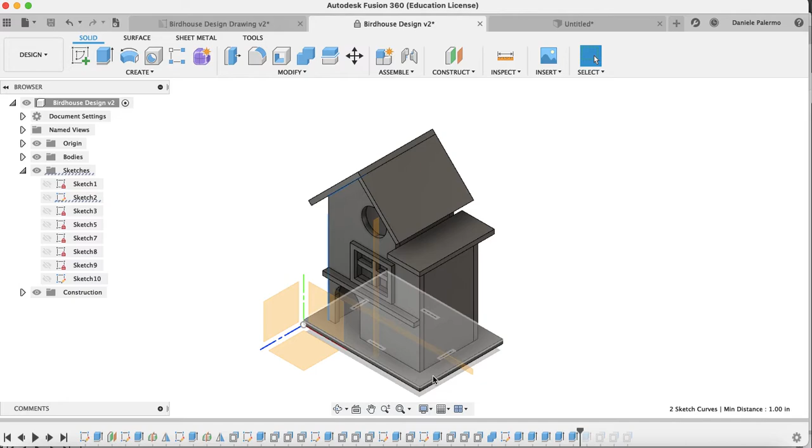All right, so what we're going to do is we're going to start by designing this base first. We'll start with the base and then I'll do the front face after that. Now the base needs to be approximately 7 inches wide by 5 inches deep.

So I'm going to create a sketch on the bottom plane, and choose a rectangle and create the rectangle at 5 inches by 7 inches. I'll zoom to fit here on my screen, and you can see the rectangle's already fully constrained. We specified the origin as well as the length and the width.

So I can finish sketch and go back to my home view here and hit extrude. So E on my keyboard for extrude.

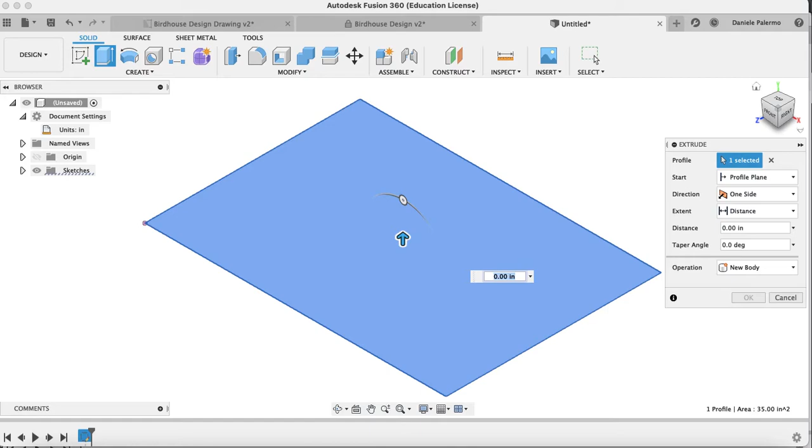Now, the size of the wood we're going to use, we're just going to use 1/4 inch MDF. So I'm just going to drag this up 0.25 inches. That's going to be the size of all our panels here.

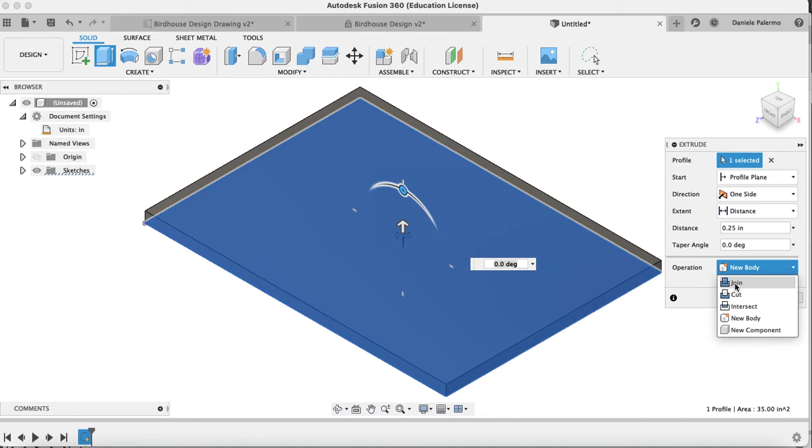By default, you'll see that it will select a new body, which is what we want, but you'll see that as we add to this, by default it won't select new body. By default it'll actually go to join, and we want to remember to always choose new body here and hit OK.

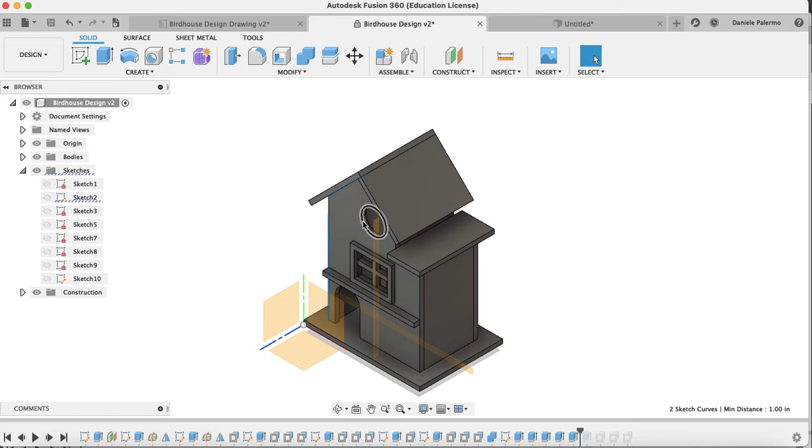Alright, so we've got our flat base here. Let's go ahead and create the front face, which is going to present the biggest challenge with respect to its sketch. As you can see from my drawing, I've got to create this outline of a shape. Now, I'm not going to create the windows or the doors yet, because planning this out, I want to take this front face and mirror it without all of those features.

I want to mirror it to the back here. So we're going to mirror across a mid-plane to the back. You can see that I created a mid-plane here. We're going to have to create one in our sketch, but let's start just by drawing the front face.

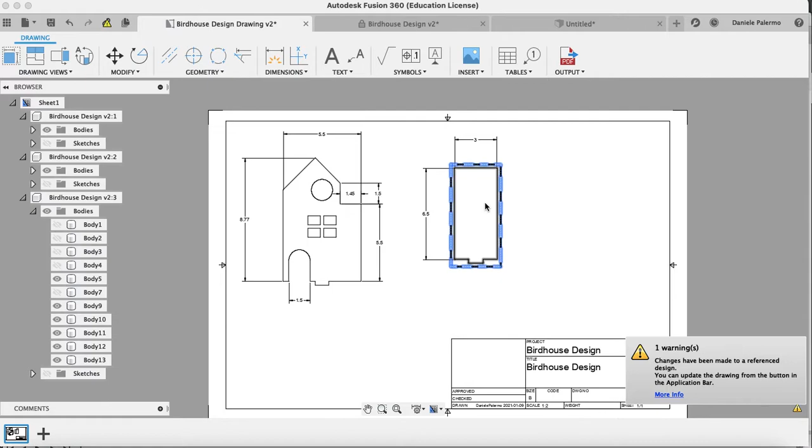Now, the front face isn't going to start right at the edge here. I actually want to sketch it. If this is 5 inches deep here, and I go to my drawing, the side panel is 3 inches. So this side panel here is 3 inches right there.

Okay, now it's 3 inches plus 1/4 here, plus 1/4 there. That's 3.5 inches. That leaves me 1.5 inches of space left over. Divide it by 2, so I'm at 3/4 of an inch here and 3/4 of an inch here, 0.75.

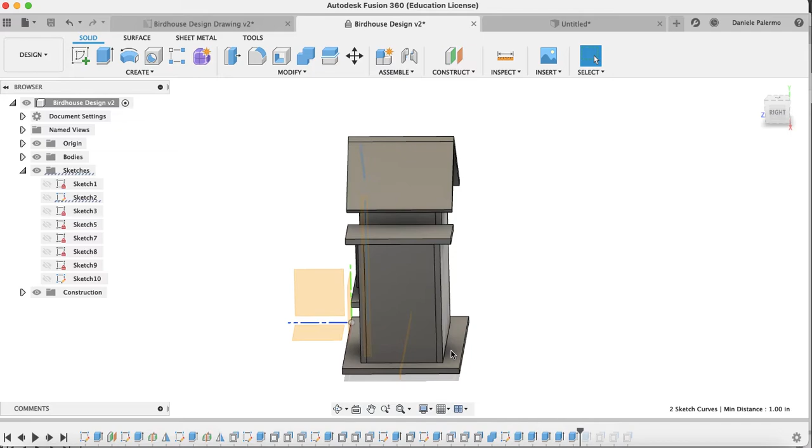So I want to offset a plane. If I view my planes here, if I just hit the little eyeball there, you can see that my planes appear from being unhidden. I want to offset this plane 0.75 inches inwards.

So to do that, I go to Construct, Offset Plane here, and drag that. Now you can see the negative sign pops up because I'm going in the negative direction. So put in negative 0.75. And there's my offset plane.

All right, so now I can go ahead and create a sketch and select this plane here. And you can see it's going to take me nicely to my front view.

Now, before we begin, I want to create a rectangle, but I have a problem. Notice I want the rectangle to snap to this line here, but there's no line that exists on my actual sketch plane. Look at my plane here, there's no line there. But I showed you in previous videos how to project some of your geometry or lines.

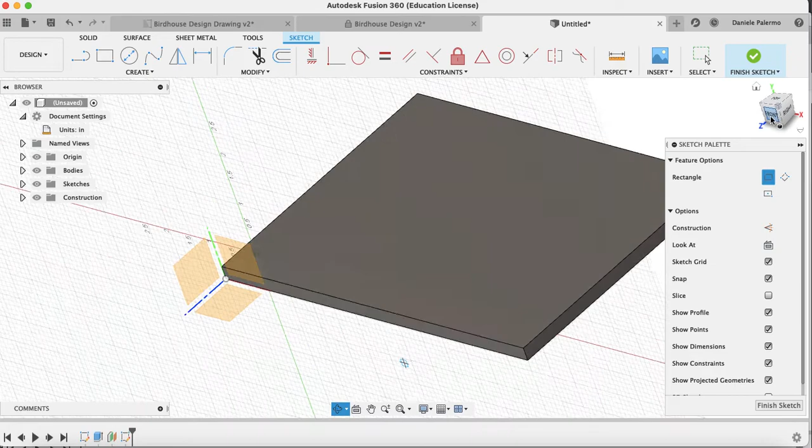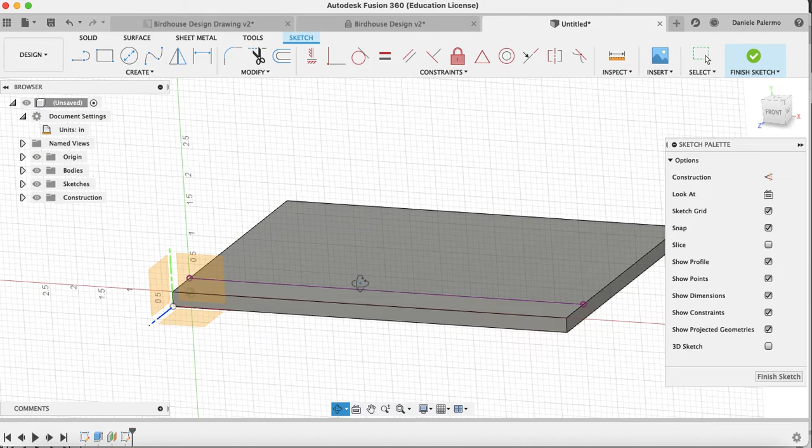So let's go back to the front view, and we're going to do this often in this video. I'm going to hit P on my keyboard after I started my sketch. Hit P and then select this line here. Now watch what happens. If I orbit around, look at how it projected that line onto my sketch. That's what I want, right? So that's an important step.

Now if I go to create a rectangle, I'm just going to create it randomly anywhere. So let's say right here. And I'll fix the size, but let's just draw that for now.

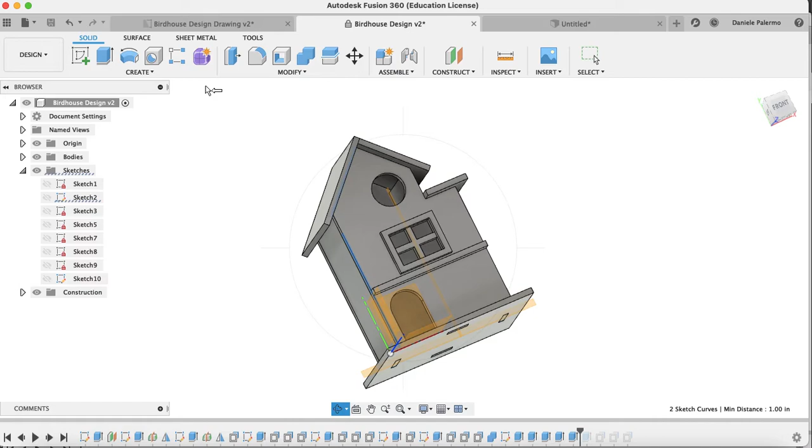Okay, now according to my drawing, I can tell you that I'm going to draw a rectangle that's 6.5 inches tall, going across this line right here. I'll show you in this drawing. Starting from here down, which is the size of my side panel, is 6.5 inches long. So I'm going to create a rectangle that tall, and then 5.5 inches wide here, since this face is 5.5 inches wide. So 5.5 wide by 6.5 tall.

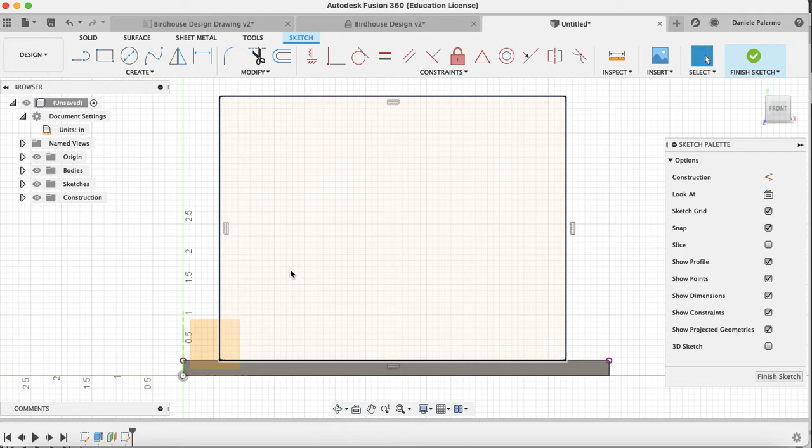Now I'll create the dimensions in a second. I can do them right now, it doesn't matter. Okay, dimension that line to be 6.5, and dimension this line here to be 5.5.

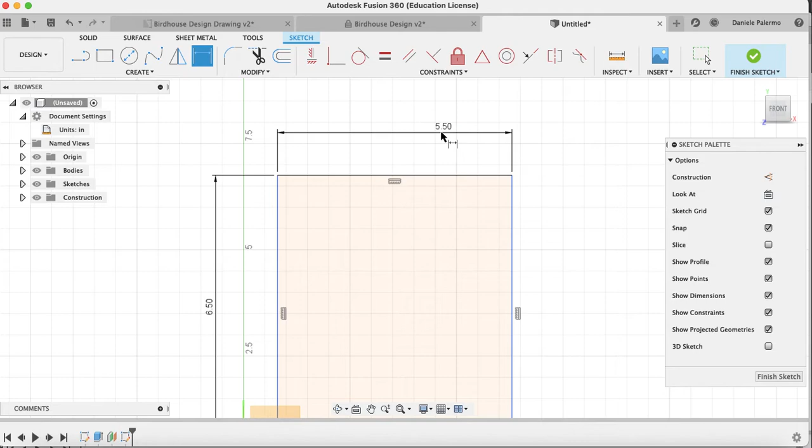Now you're probably saying, okay, well, this needs to be centered, right, this rectangle. So let's go ahead and figure out a way that we can center this. The way I'm going to do it is I'm going to actually draw a construction line in the middle. Construction lines, of course, are not part of your geometry, they're just there as reference. So I'm going to create a construction line right up the middle from the midpoint here of this line.

And then I'm going to create a constraint, a symmetry constraint, constraining this side and the middle to be symmetrical. All right, so we're going to do that.

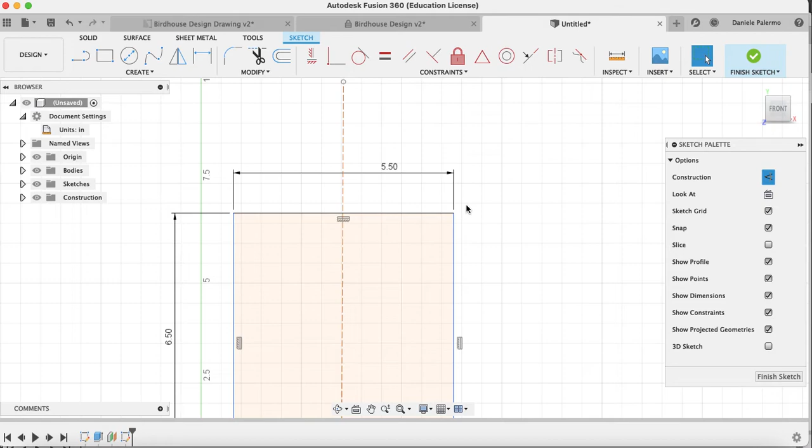So let's start by creating a line, making sure we're selected on construction line here. Okay, and we should snap, there it is, when the triangle pops up, that's the midpoint. So click, drag up, and I don't care how big this is right now. Make it much bigger than it probably needs to be because we'll need that additional space later. So there's our construction line. I made that like almost 10 inches tall there, just for your reference.

Now we're going to go to constraint, symmetry. It's 3 clicks here: 1, 2, the sides that you want to make symmetrical, and then the center line. And you can see that adjusts and actually fully constrains, because that center line was created on this whole bottom projection line. So it is now centering my rectangle on that projection line.

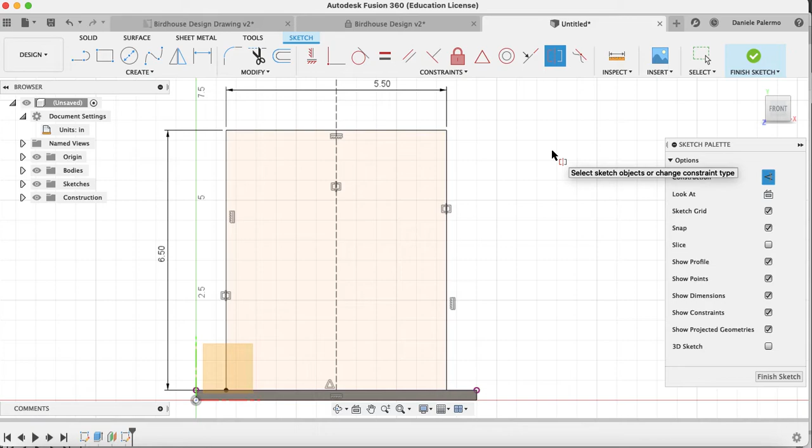Okay, so we've got our rectangle. And if you look at this design, it's got a step in and then it goes up and comes together with the roof after it's stepped in. I'm going to worry about that later because I want to make sure that I draw my roof pitch at a 45-degree angle here and here, and a 90-degree angle by default. If this is 45 and 45, this top angle needs to be 90 - the angles need to add up to 180. I want this to be 90 degrees so that my panels can fit together. Once I extrude my roof panels, I want them to fit together in a perpendicular fashion.

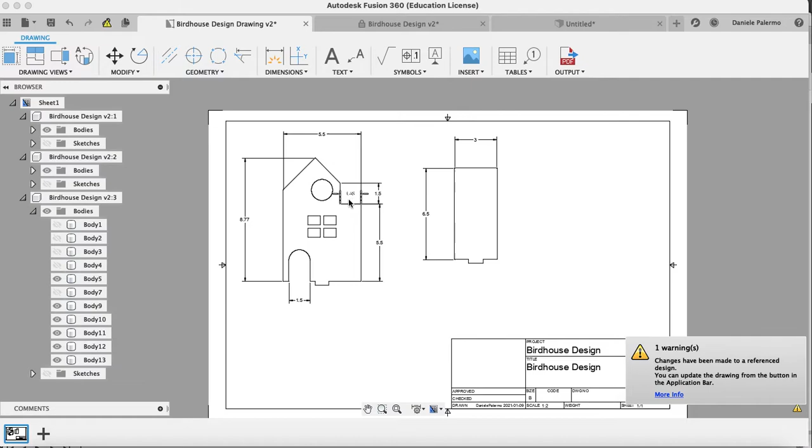So let's go ahead and do that, and I'll worry about this little step here a little bit later. All right, so back to my sketch - I want to create a line from this corner to this corner.

And you can see 45 degrees. Oh, and it's a construction line, so let's remove that construction button there. Back to line, and it should snap to a 45. You can see there it is, it snapped to a 45.

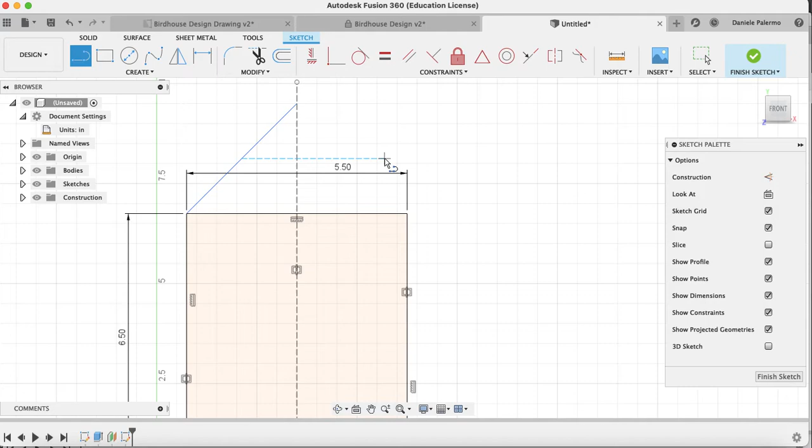Now I'm not going to worry about the length so much, so let's just click there. And then let's do another line from here to here, and that should, of course, also be 45. It says there 135 - that's just because it's using the supplementary angle of 180 minus 45. So it's fine, it should all work there.

Now that should by default make this 90 degrees, right? I probably should put a constraint there to say that, because it may end up being over constrained. Let's see, I want this and this to be perpendicular. And there you go, perfect.

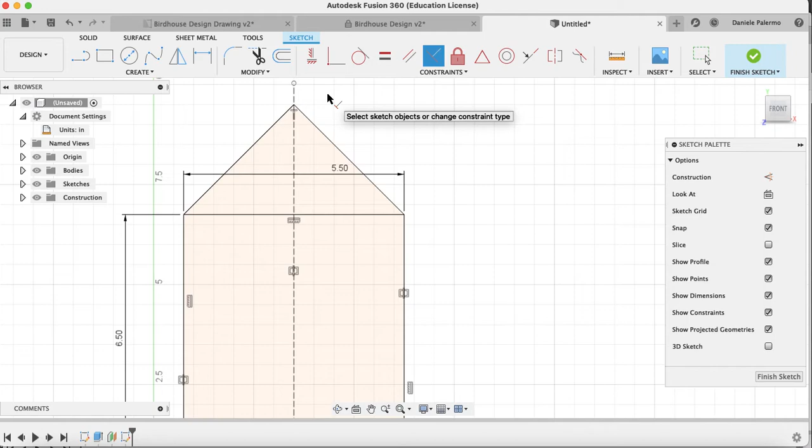All right, so I don't even need to dimension anything after this. All I wanted to make sure was that these angles were 45, 45, and 90. I don't care how long those lines are. Okay, and if I hit T on my keyboard, I can trim - hit T and I can actually trim that line if I wanted to. But I mean, it's a construction line, so I don't really care.

Okay, let's do that step in now, right here. So I'm going to hit L on my keyboard for line, and I'm going to just choose anywhere right here to click, and then maybe click here, and then go up until you touch your roof. All right, now let's trim out some geometry.

This line, and this line. Now you can see that totally removed any constraints from my sketch, but we're going to add some dimensions and you'll see that the constraints will come back. That happens after you trim, okay, because you've gotten rid of some geometry, but we'll fix that. And actually we can trim this line and this line as well.

We don't need that. All right, so I'm going to hit D on my keyboard for dimension. I'm going to make this line 5.5. And let's say that this line here is going to be 1.5, a little bit less, just to give you more of a roof there, more like a longer panel. And then I shouldn't need to even create this dimension, but that works out nice that it's 2.5.

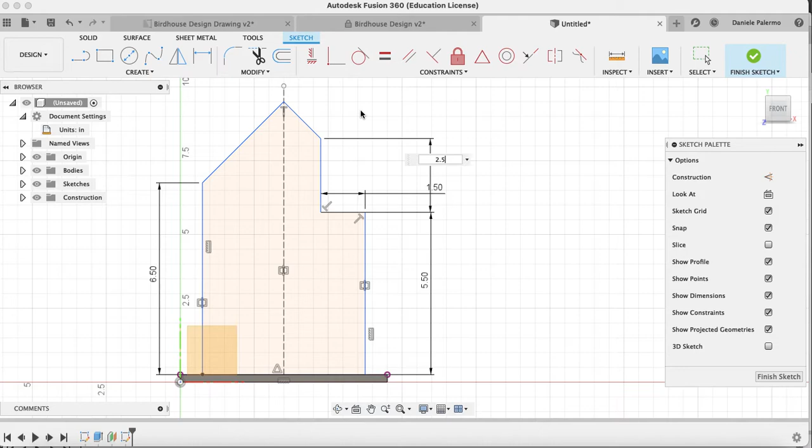And let's maybe create this dimension here, not that it matters. And you can see that then everything becomes constrained again and everything turns black, which is what we want.

All right, so I think I'm happy with this. Maybe the only thing I might change, maybe I'll push this up to 5.75. So I'll double click that dimension and change it to 5.75. And maybe let's double click that and change that to 1.4. Okay, I think I like that better.

All right, so I'm happy with this. It's fully constrained. Let's finish sketch. All right, and let's hit E on our keyboard. Oh, and actually I did forget one important thing.

So let's go back in and edit my sketch. I just right click the timeline where the sketch was and edit sketch. I want to add two tabs that are going to be pushed into this bottom base to kind of locate and help me hold together this panel here. Because I am going to glue these together, but I want them to be able to stand on their own as I'm gluing them. So I want to create tabs that are going to cut into that base.

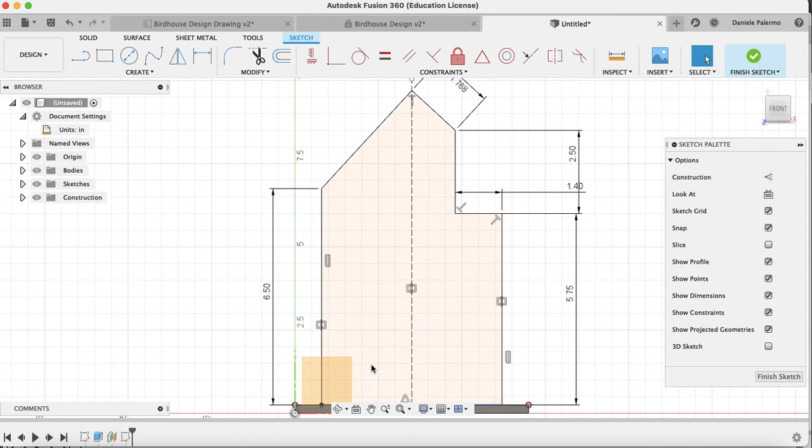So let's do that. All right, so first this base is kind of distracting because I want to put two tabs here. So I'm just going to go to bodies and hide that bottom body. All right, now I'm going to hit R for rectangle and just create any random rectangle. Now, since it needs to cut into my quarter inch plywood, this should be 0.25 inches, right?

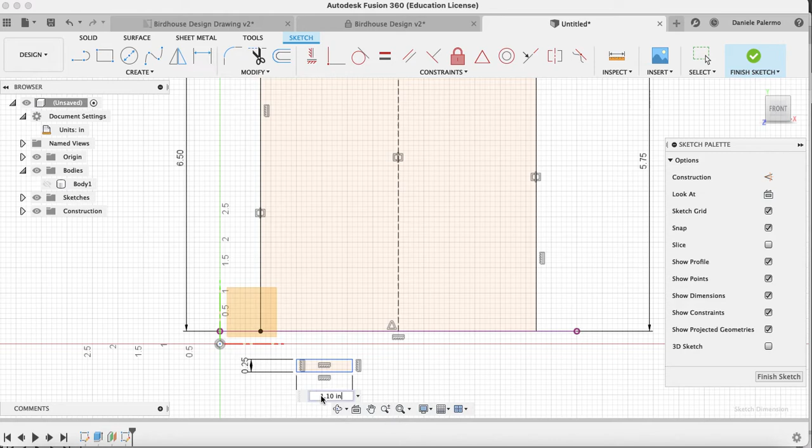And this line here, let's make that 0.75. That should be good enough. Let's make it 1. Let's change that to 1.

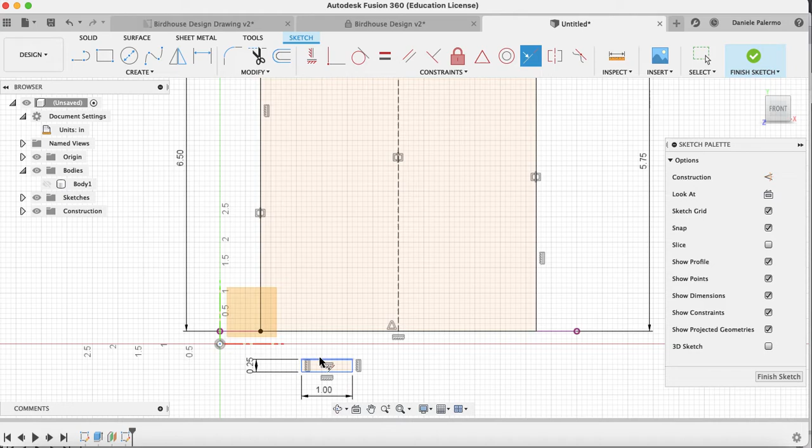All right, now I want to attach this to here, and I'm going to use a constraint. So hit escape to escape out of the dimension tool. That's why it's still blue, I need to give it a location, right? So I'm going to hit a constraint, and I want to do the collinear constraint, meaning that I want to make this line on the same line as this line. All right, and it'll place it on that line. Now, let's give it a dimension off of this side so that it knows how far away from there it needs to be. So dimension from this point to this point. Let's make that 0.75 off.

Okay, we can even go a little bit less. Let's double click that and change it to 0.65 maybe. Okay, I like that better. Gives you more space in the middle here.

All right, and now what I'm going to do, the nice thing is I can just mirror that across this center line. I don't have to create another one here from scratch. If I can just select this here, do a window from left to right, go to create, mirror, okay, and that's already selected because I selected it. So go to mirror line and select your mirror line, and look at that, it pops up, and it's already fully constrained. All right, perfect.

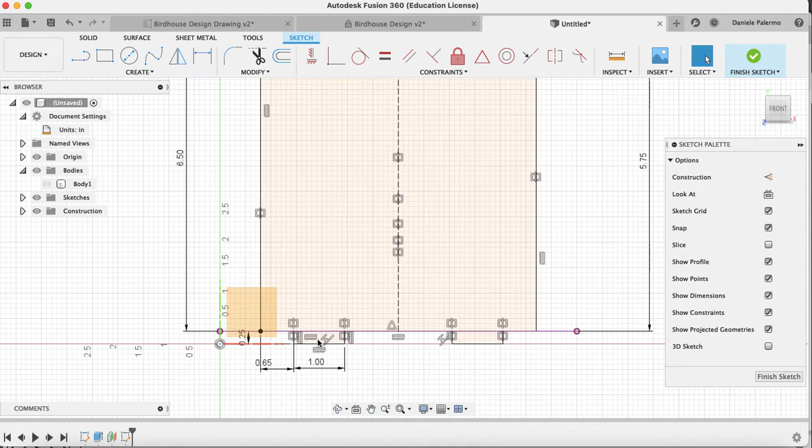So I added those tabs. So let's put the body back in. Let's unhide that. Let's go to finish sketch, home view. All right, and let's hit E on our keyboard for extrude. And actually, let's still hide that body just so we can see those tabs.

We need to extrude those tabs as well. So we're going to extrude this, this, and this 0.25 inches inwards. So I just flip the direction so you can see that it comes up as negative. So put negative 0.25. All right. Now, just make sure that the operation is new body. Okay, make sure it's new body.

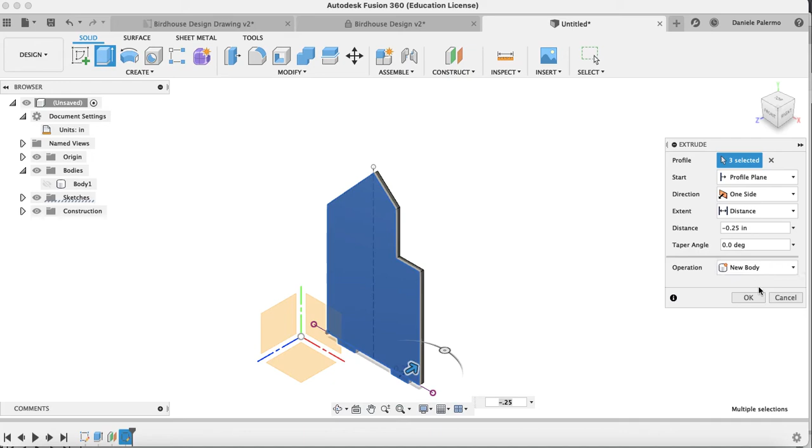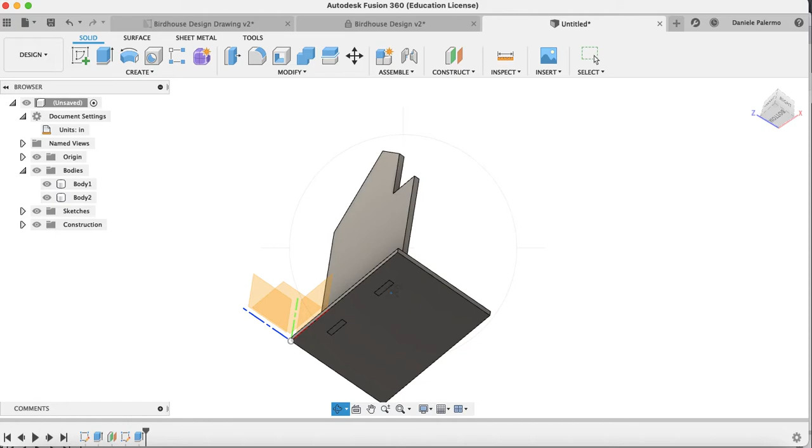Okay, hit OK. Now let's unhide this. You can see those tabs are going into my base, but we need to cut out those rectangles in my base. I'm going to do it at the very end because right now we have intersecting geometry. We'd actually get an error here because this is going into my base, but I haven't cut out those shapes in my base yet.

Let's move on and mirror this to the back. Remember I said I was going to mirror that. But to do that, I need to create a mid-plane. Once I'm in 3D, I cannot create a line and then mirror across a line. That's only in a 2D sketch. When I'm in my 3D model, I need to mirror across a plane.

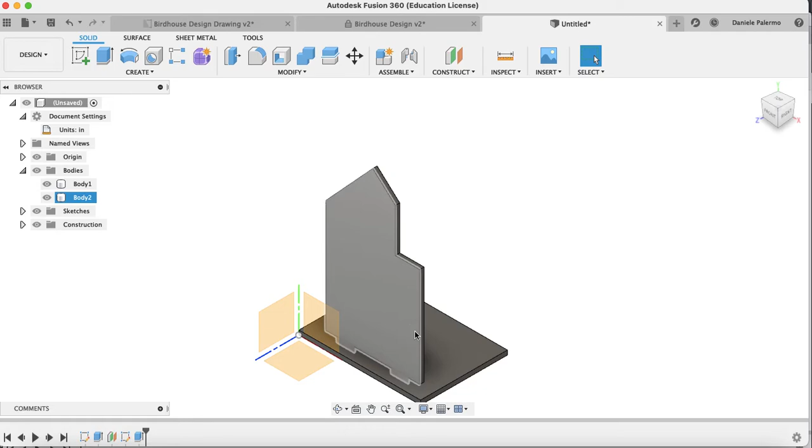So what I'm going to do then is create a mid-plane on this base. If I go to construct, mid-plane, select where you want the plane to be in between. I want it to be in between this face, orbit around, and this face. You can see it drew the plane. Perfect, hit OK. Now I can go to create, mirror.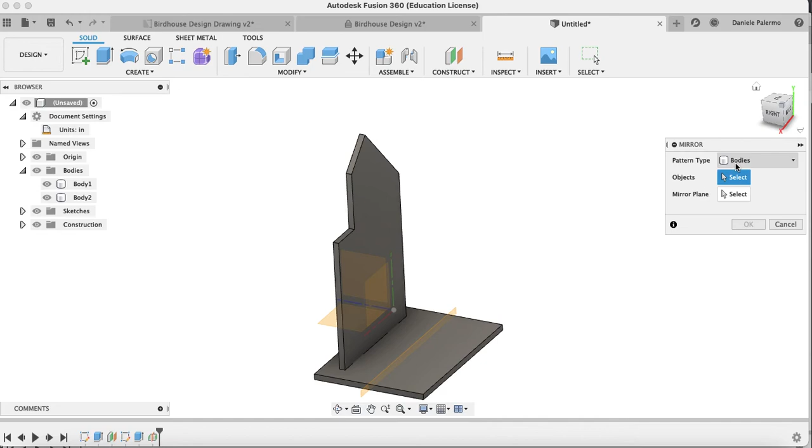Select, make sure that your pattern type is bodies. I think by default it will be faces, so make sure you change it to bodies. Select this body, then select the mirror plane right there and hit OK. You can see that saved us some time, I didn't have to draw that from scratch.

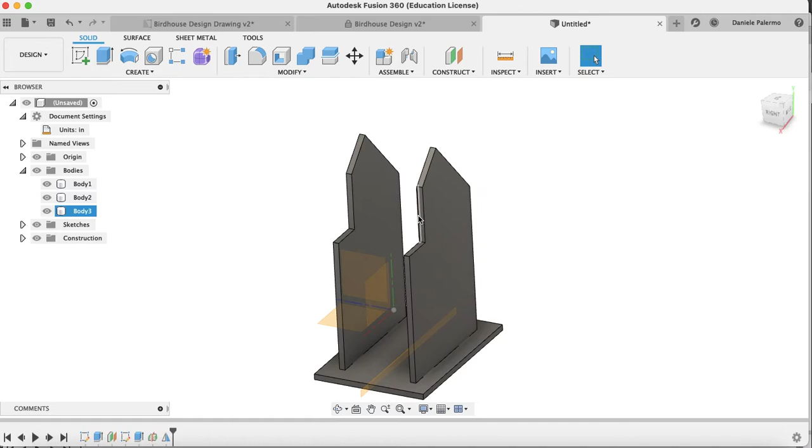So let's go ahead now, I'm going to do the side panel. There's a side panel here, one up here, and then one on the other side there. Let's go back to my home view so I can see what we've got. Now this is actually going to go by a lot faster because these panels are a lot easier to make.

So I'm going to create a sketch on this surface. That will allow me now to draw a rectangle there. If I orbit around, you can see that my plane is exactly where I want it to be. I want to sketch on that plane there.

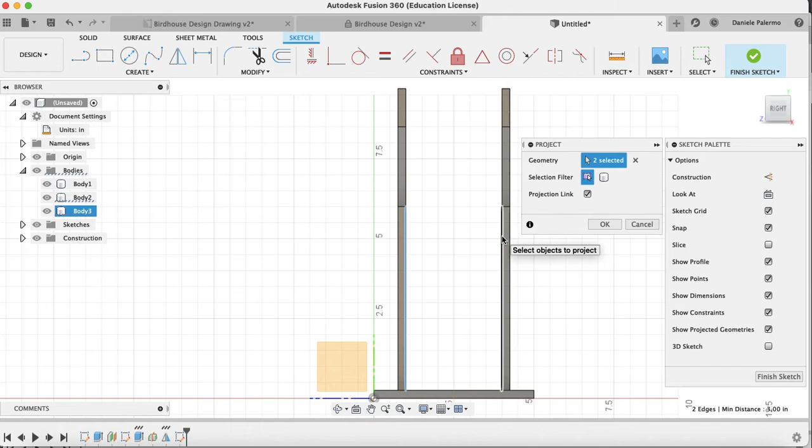Hit escape and go back to the right. Now if I hit rectangle, you may have an issue selecting a proper corner here, so we're going to project these lines. I'm going to hit P on my keyboard, and select this inside line and this inside line because that's where I want my rectangles to be, and hit OK. So I'm projecting those onto my sketch so that these points pop up. Now when I hit rectangle, I can just connect those points.

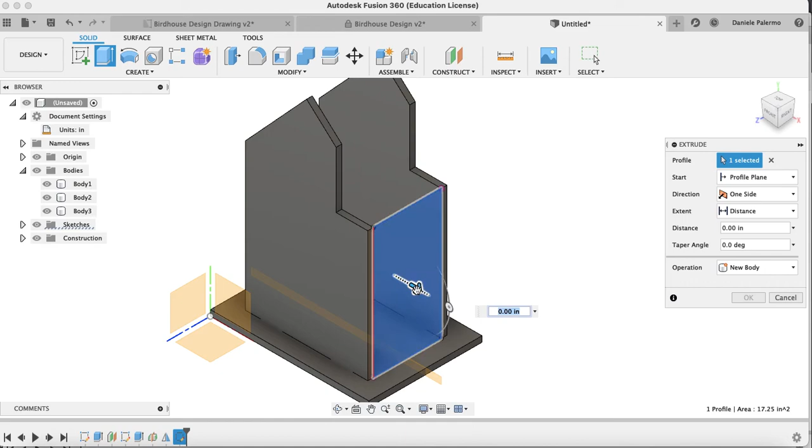And there you have it, it's already black and fully constrained. I can actually just hit Finish Sketch. Now hit E, extrude this inwards, so it'll be negative 0.25. Now be careful here, watch this. Look at by default how this is at join. Hit Tab, so it inputs that negative 0.25, and then make sure you change this to new body. By default it wants to go to join. Okay nice, let's do this up.

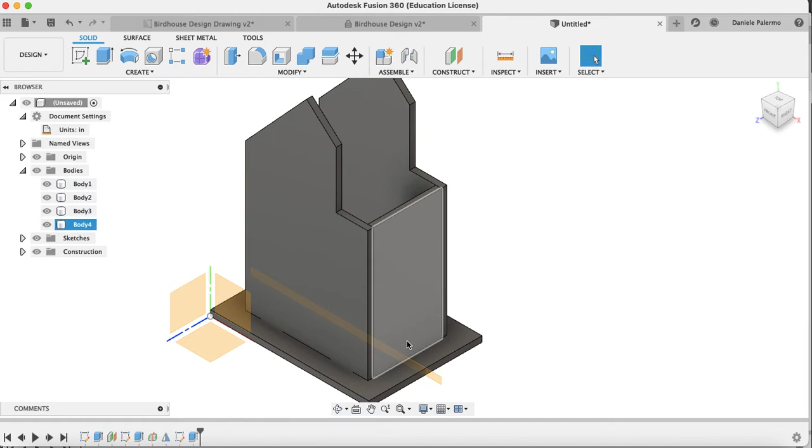Oh, and actually once again I forgot to put those tabs. So let's do that again. I'm going to have to go back in this sketch and edit my sketch. And again I want to hide this base. So body 1, and actually I should rename that.

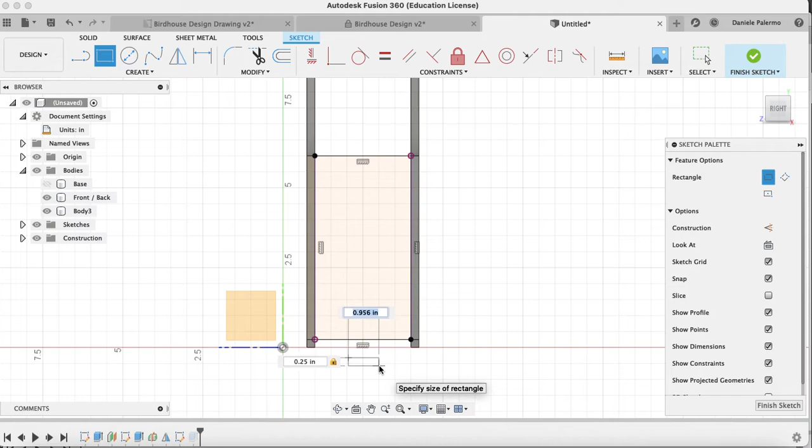Okay, and this will be right bottom. So I need to add tabs. I'm going to hide this base, and I'm going to create a rectangle. Again, make it 0.25 deep there or tall, hit Tab, and I think we made them 1 inch wide. Now you can see it's blue, no problem. We're only going to do 1 tab right in the middle here.

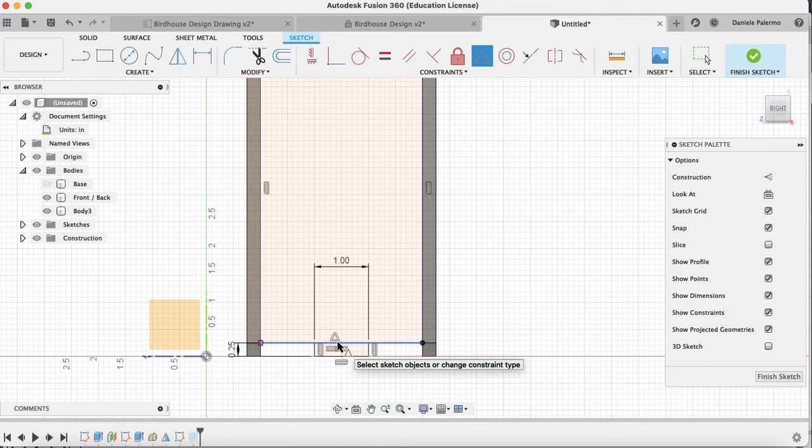So we're going to do a constraint again, not a collinear this time. This is going to be even easier because if I do a midpoint constraint, I can constrain this midpoint of the line there and then this midpoint of the line there, and you can see it already turns black, it's fully constrained. I gave it a location. Okay, let's finish sketch.

And now we have to edit the feature, so the extrusion, to also include that there. So I just clicked on it and hit OK. And if I orbit around, I should see that that worked. It did. And let's turn that base back on. Good. Now we can't mirror that, we're not going to mirror that right now because the other side is longer. So we'll just keep it as is.

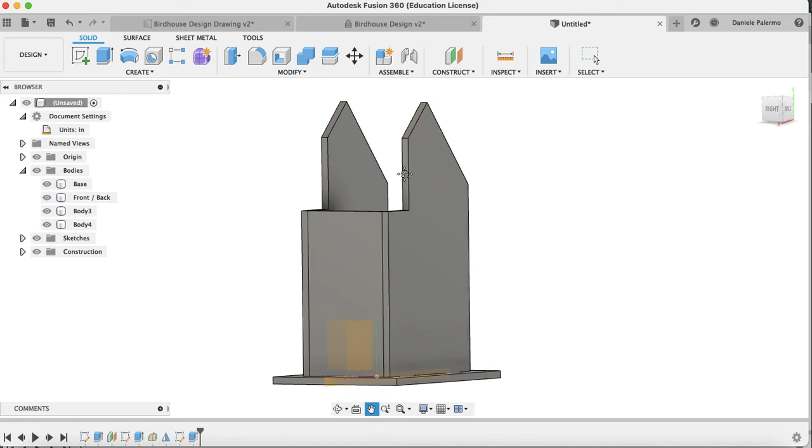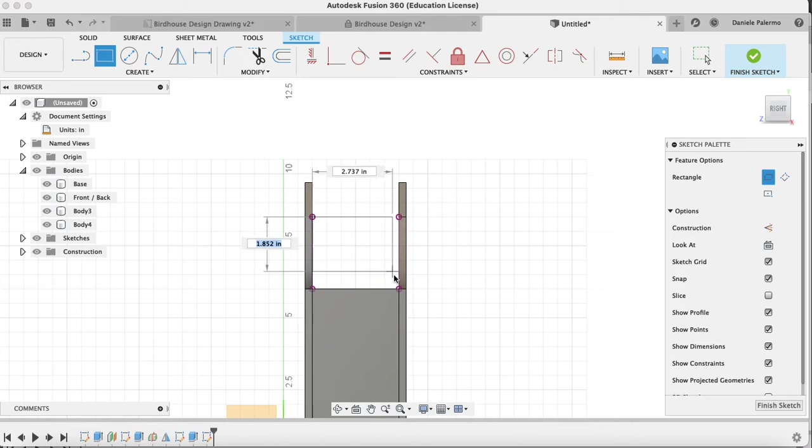And let me do this front face here. So I'm going to create a new sketch on this surface, and I want to project P on my keyboard, this line and this line, and hit OK. Hit R for rectangle and connect. It's already fully constrained.

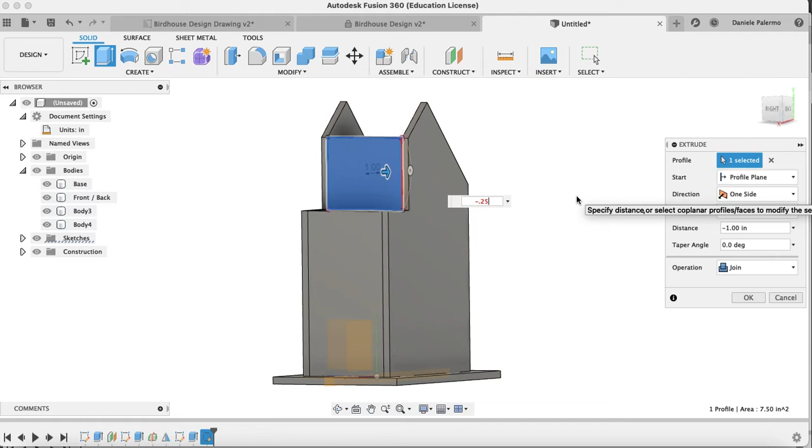I don't need any tabs there, I won't do any tabs there. Finish sketch, hit E on your keyboard for extrude. Select, drag it inwards, it'll be negative 0.25. Now again, be careful, it goes to join, change to new body, and hit OK. All right, it's coming together.

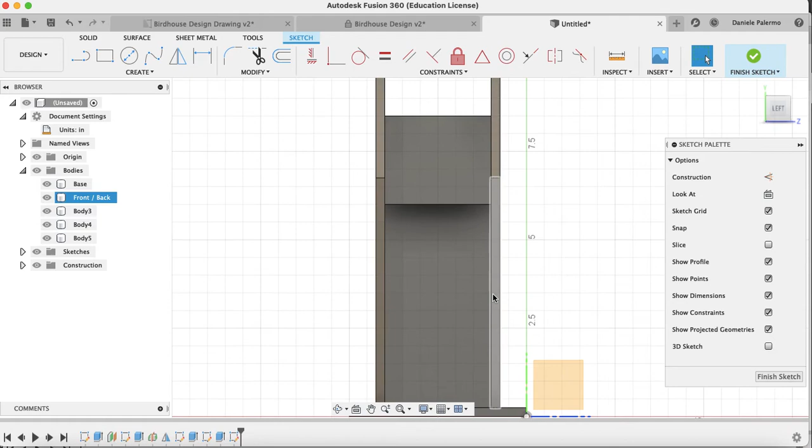All right, now let's do another new sketch right on that surface. Again, P on your keyboard for project, this line and this line, and hit OK. R for rectangle. Simple as that, everyone. Finish sketch. Okay, and let's hit E on our keyboard.

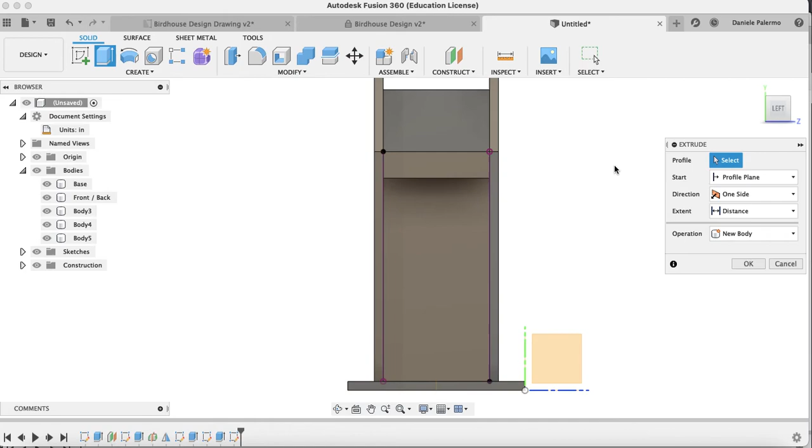And just orbit around a little bit so we can see that we want to drag it inwards. Okay, negative 0.25. Oh, and I just realized that I did not hit new body, so I'm just going to edit my feature, make sure that it's a new body, and keep everything else the same.

Okay. All right, now we're going to do the roof panels. So we can start with this roof panel. This should go fairly smooth. And now you're going to see why I made those angles. That angle up here, 90 degrees. You'll see it now. All right, so I'm going to create another sketch

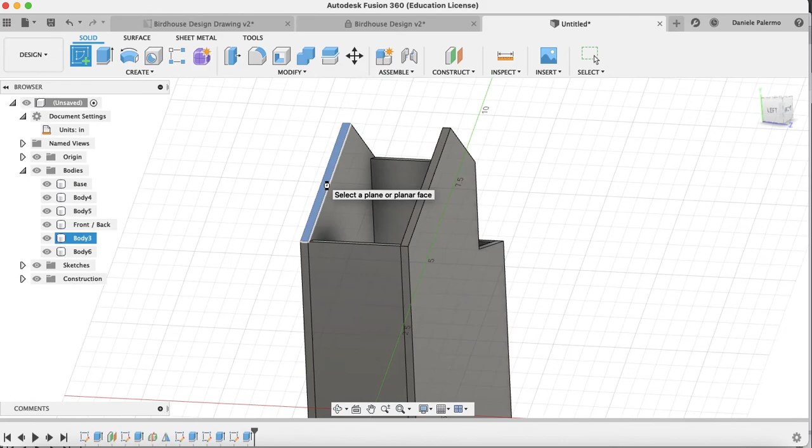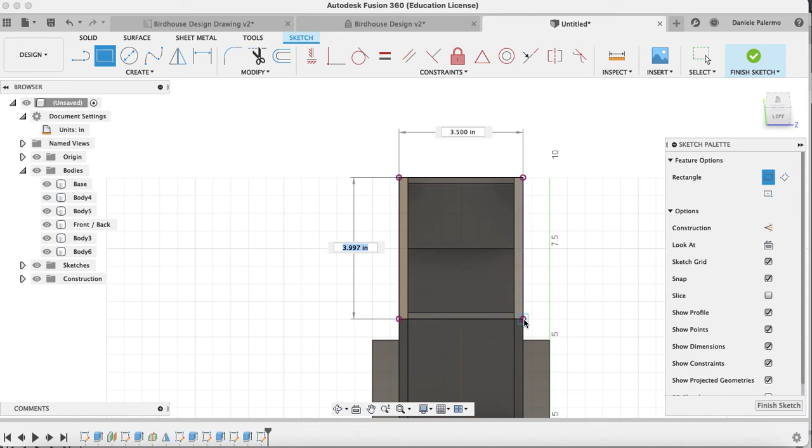here. This time I want my rectangle to be, because my roof is going to overhang, right? So I'm going to actually not project my inside line. I actually want to project my outside line. Okay. Hit OK. Now create a rectangle. Okay, it's going to sit on top there. All right, finish sketch, E.

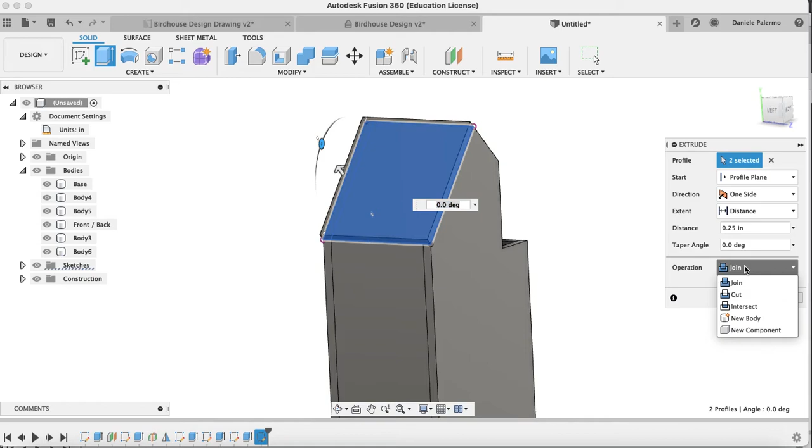And this time pull it upwards. We want the roof to sit up, and we want that to be 0.25 again. And once again, oh, and look, this always happens, all right? For some reason, it doesn't want to select this extra part here. Make sure you click on that too. All right, that happens for whatever reason. And then make sure you go to new body and hit OK.

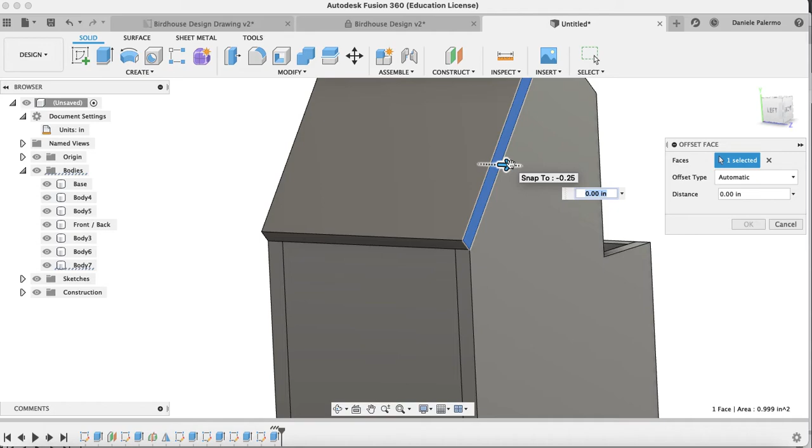All right, now I'm going to show you the press pull tool because we're going to have an overhang here. So a lot like we did with Google SketchUp, this button here is your press pull tool, and you can select surfaces to press pull. So press pull and then select the surface, and I'm going to pull that out, let's say 3/4 of an inch, 0.75.

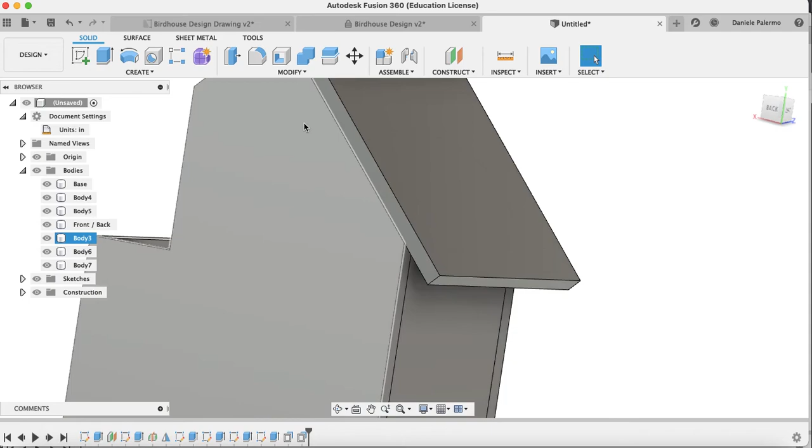I'm going to press pull here as well, 0.75, and orbit around. Do it here as well. Okay. And there's part of our roof there.

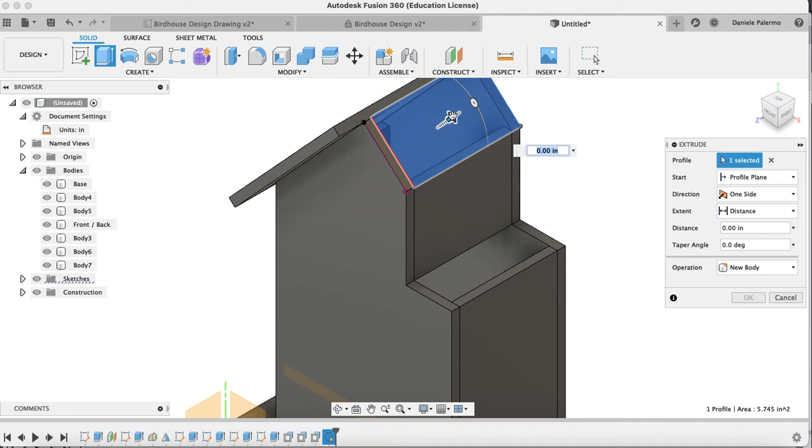Now let's do another sketch on this surface. P on your keyboard, and again, choose the outside lines. R. Okay, create a rectangle there. Perfect, and hit finish sketch, E for extrude, select your surface, and pop that up 0.25 inches.

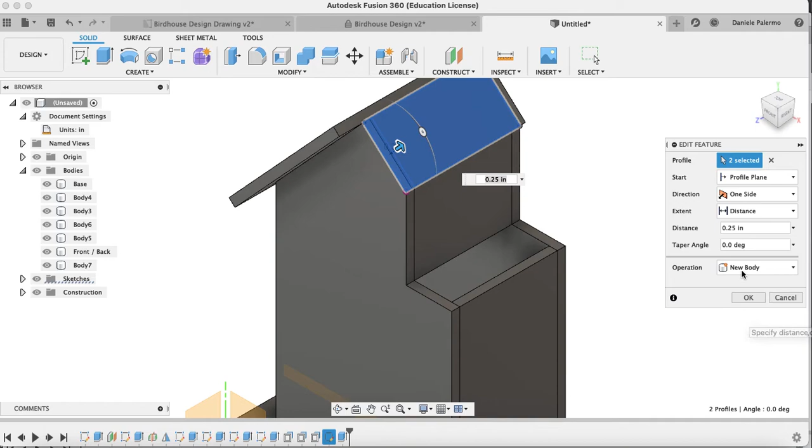Oh, and look, again, it didn't select that portion there. So let's go to edit this here and just add this rectangle. So just hover your mouse over that and click on it, and then, oh, and I forgot to do new body. Okay, it's very easy to forget to do that, but the good news is with Fusion, you could so easily go back and edit it, right? All right, let's push pull.

I'll do this one fast because I've already showed you how to do that. Just might need to zoom in there in order to grab that there.

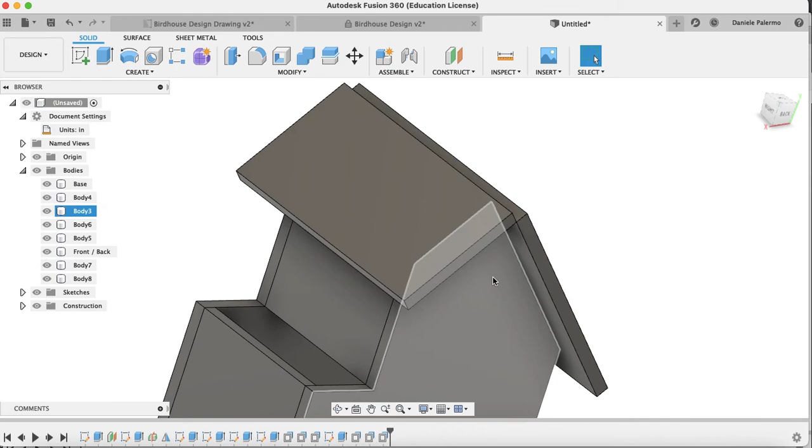Okay, now look at this situation here. Here's why we made our angle 90 degrees, so that these will fit perpendicular. So I can choose one of these, like this longer piece here, okay? Or actually, let's choose the smaller piece. Might look nicer. To push-pull, 0.25 inches to line up with that other panel.

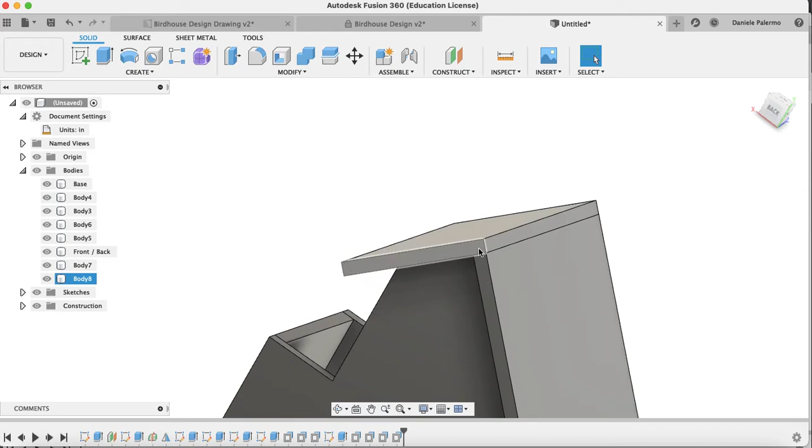And there you go. That's why we chose 90 degrees. Look at that 90-degree angle in there. Otherwise, they wouldn't fit like that, and you'd end up with intersecting geometry. Now, there's other ways around that, you can do other roof pitches, of course, but then once you carve out your wood, you'd have to probably sand down or file down the edges so that these fit nicely, right? But it's still, of course, doable. I just like to do it at a 90 there, keep it easy.

And let's do a roof here. So, new sketch. We're almost done. All right, now I don't like that that's in the way. Here, let's just orbit around a little bit. I probably should have done this first. Let's just hide that. Okay.

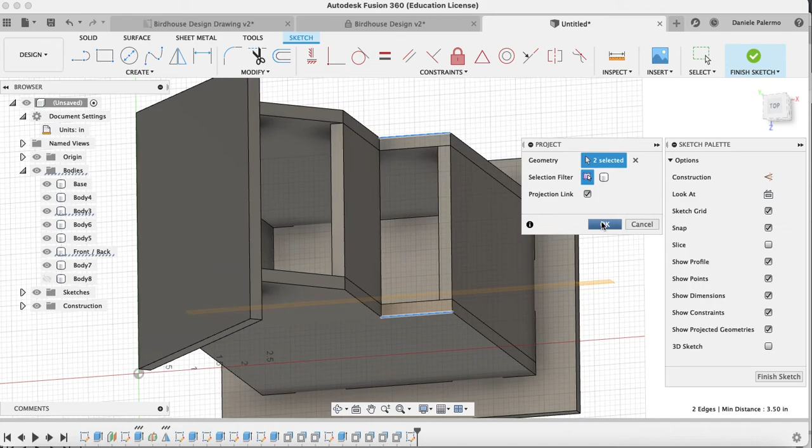So again, let's project, P. Let's project the outside lines there. Okay. Hit OK. And then R for rectangle and connect that there and finish sketch. E for extrude. You can see a lot of this is just getting repetitive, and then go up 0.25, tab, and make sure that it's a new body.

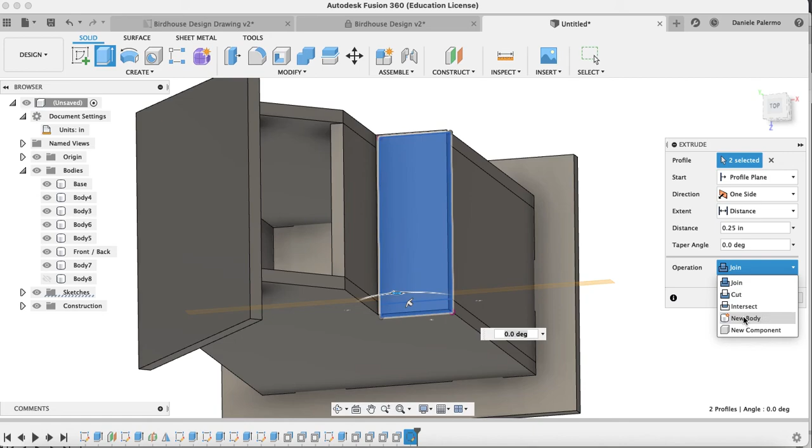Oh, and again, it didn't select here. So make sure you do that, and new body, hit OK. We're going to push pull, of course, or press pull. We want to have some overhang here. So let's go, we'll maybe do a little bit less. Nah, you know what, let's go 0.75. It'll be kind of a hangout for the birds.

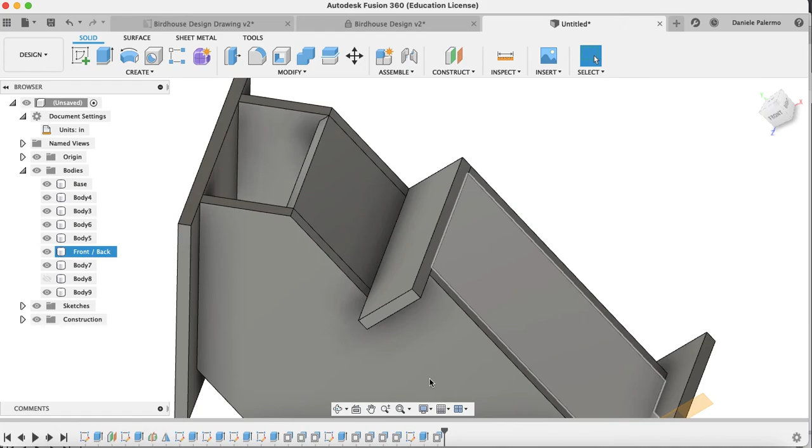Okay, 0.75 and 0.75. Okay, perfect. And looks like we're good to go.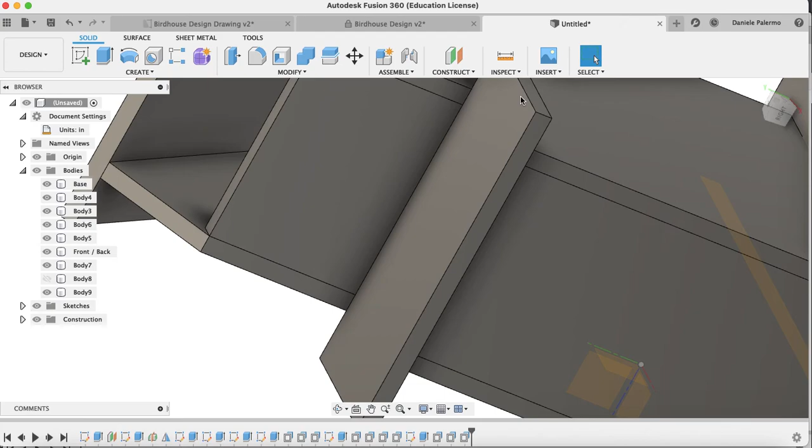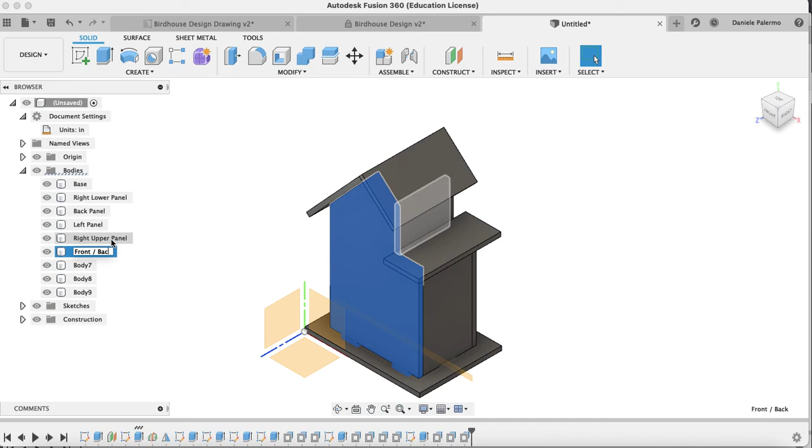Let's go back to view that roof, and let's rename these. Body 4 is my right lower panel. Body 3 is my back panel. Body 6 is my left panel. Body 5 is my right upper panel. This should just say front panel, to stay consistent. This is my left roof panel. Body 8 is my right roof panel, and body 9 is my flat roof panel.

Okay, perfect, so there it is. Now, I did say that we needed to cut into the base. Now that we have everything down here, let's cut into the base. You can watch how easy this is in Fusion.

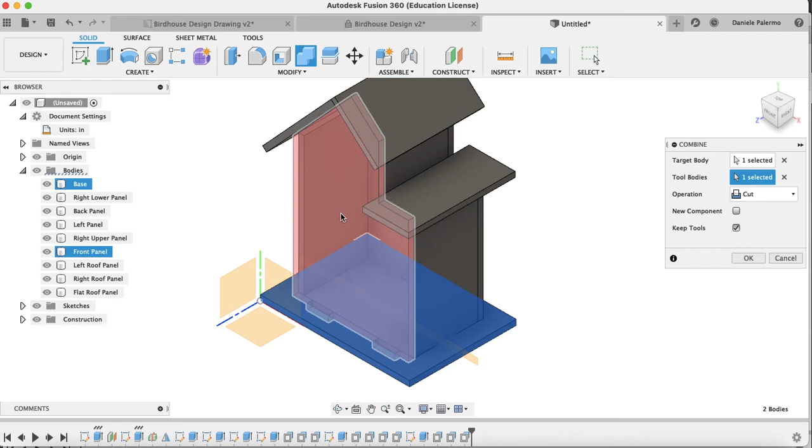There's a button here called Combine. We're going to hit the Combine button. We are going to select the target body that we want to cut, so that is this bottom panel here. Then it says choose the tool body that you want to do the cutting. So it's this, we want this to do the cutting, to cut into my bottom panel. Orbit all the way around, this, and this.

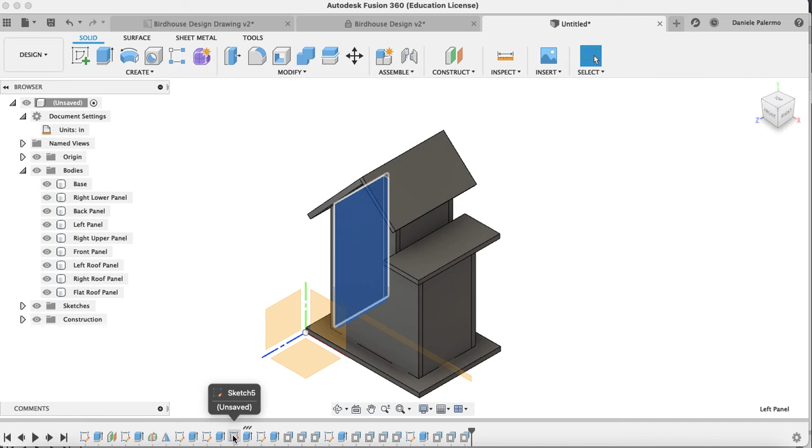Oh, and actually you can see here, I did not do my tab there. All right, so let's cancel. Good thing I labeled and named these panels here, so that would end up being my left panel, right there, right? So let's see where we can find it... there it is, there's that sketch there. All right, so that should be it.

So let's edit the sketch. Now we need to orbit around there, it should be on the other side. Let's view from the left view. So this happens, right? You might forget something, but you can always go back and edit it. That's the beauty here of Fusion.

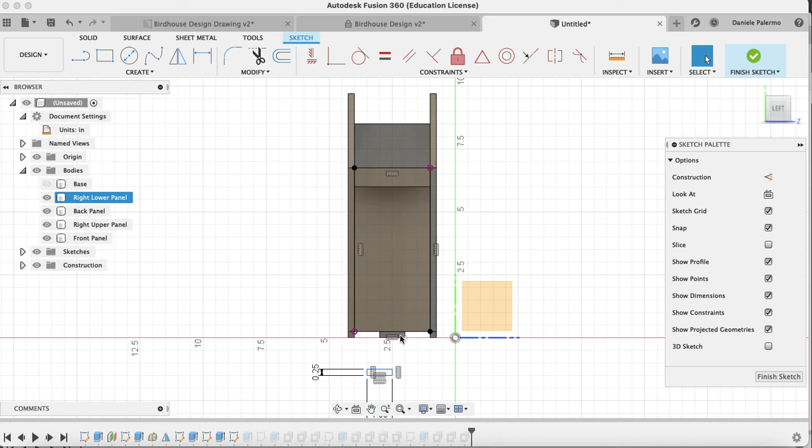So hit rectangle, we want it to be 0.25 by 1. Now let's hide that base. And let's even hide the right lower panel because that tab is from the panel on the other side, so let's hide that too just so I could see better. Let's zoom in. And now let's do a midpoint constraint for this and for this.

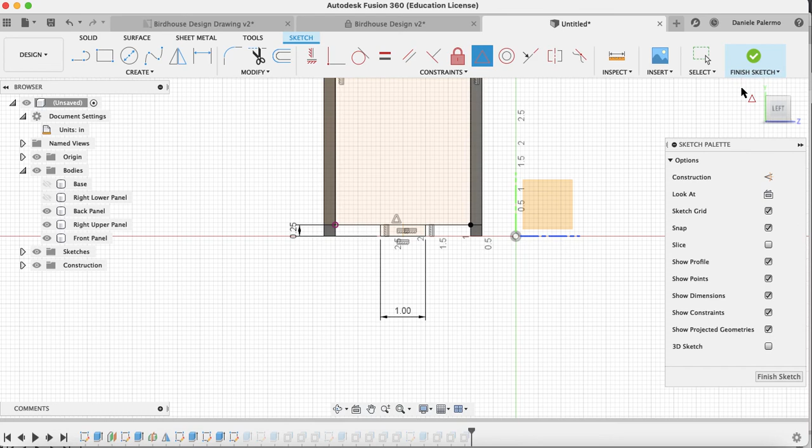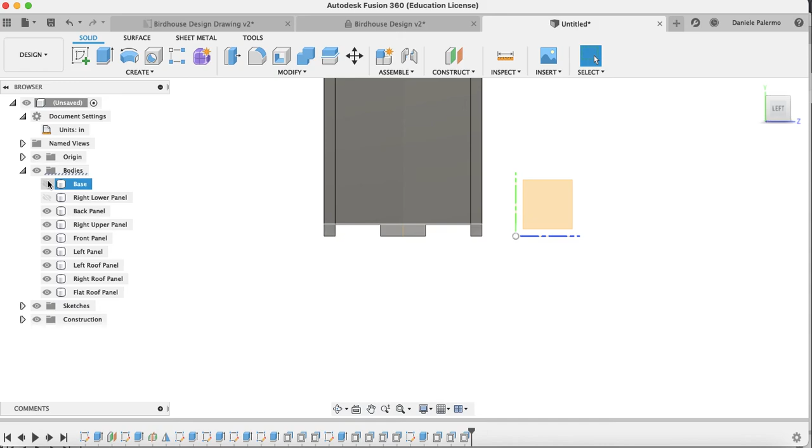Okay, we could hit finish sketch, and then we're going to edit this extrusion, extrude 5. Because it's still not showing up, we got to go to extrude 5 and edit that feature and make sure that we also click on that there. And then everything else is good. Hit OK, let's go back to unhiding these. Okay, and now we're good to go.

Let's now go back to the combine tool. Choose our target body that we want to cut right there. Our bodies that we're going to use to do the cutting will be this, that, and that. All right, so it should say 4.

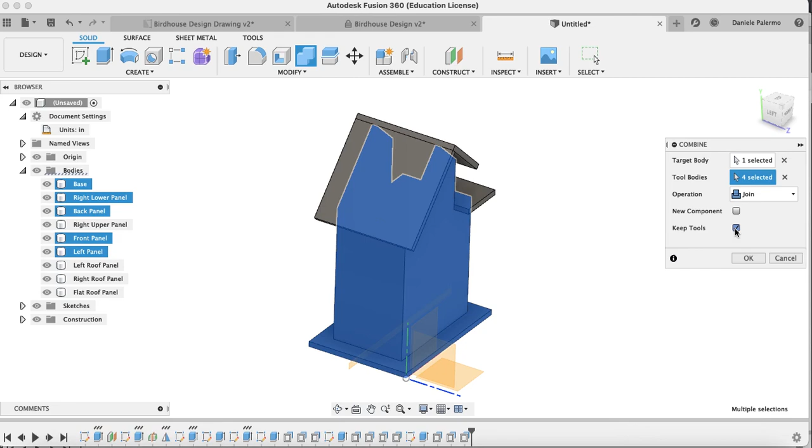Now by default, I'm pretty sure yours won't say cut, it needs to say cut. I think by default yours will say something like join, you don't want that. And by default this will not be checked off, so you need to change this to cut. And you need to say keep tools, like you want to keep these tool bodies, you don't want them to be gone. Otherwise they'll be gone. So hit keep tools and hit OK.

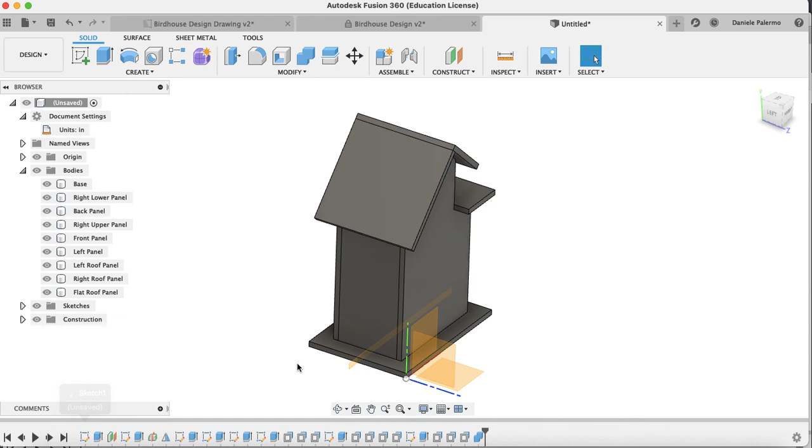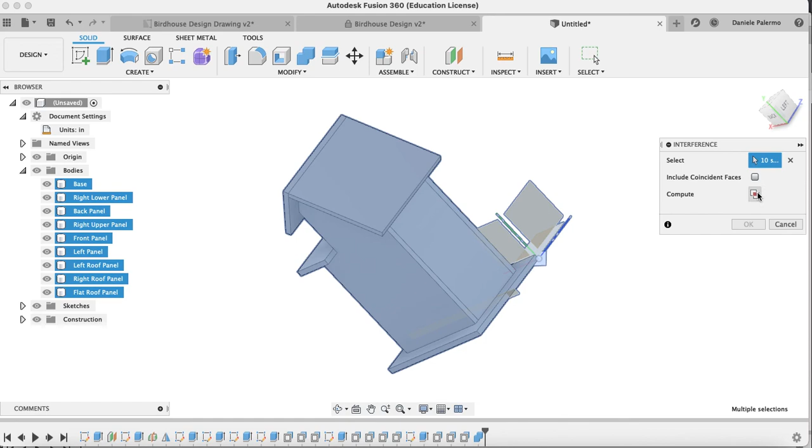All right, and now if I were to go to that very first sketch of mine, I should end up seeing that those rectangles were in fact cut out. And you can always check if you have any intersecting interference in your model. So if you select it all and go to inspect, interference, it's already selected because I selected it all. Now just click on compute, and look at that, it says no interferences detected. That means I properly cut out those rectangles at the bottom in the base. Otherwise it would say that I have interferences.

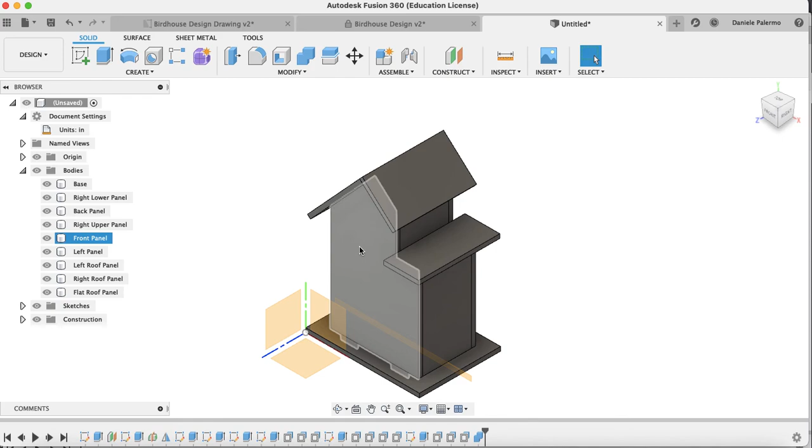So there it is, there is my plain birdhouse without any features on the front like doors or windows. I'll do that in my next video tutorial so this one isn't too long. So in the next video, we're going to add some features here, and then I'm going to show you how to take all of these panels, lay them flat, and then save as a DXF file for our CNC machine. All right, so that'll be the next video.